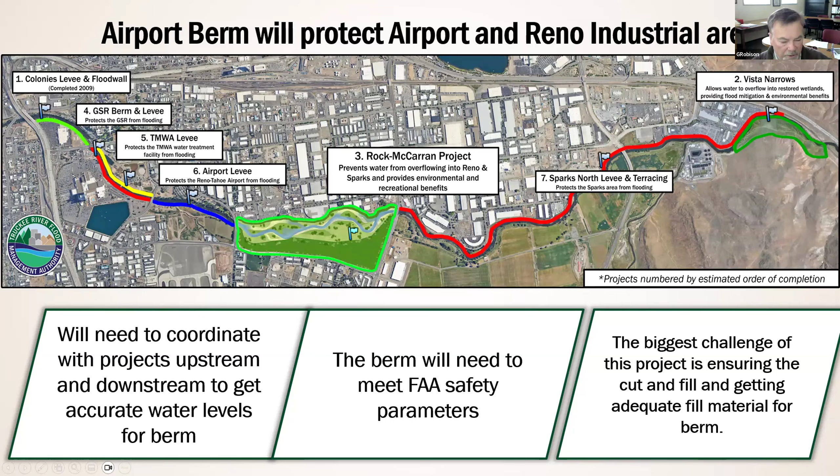So we're looking for a firm that could do all that, and we wanted to get this rolling so that when we're doing all these other projects, it works right in with that for permitting, cost analysis, and everything else. So our selection process—I haven't talked about this one yet.

I did talk about the other two. It sounds a lot like the other two in a lot of ways. Same time, early January, we got out the RFQs. There were 6 statements that came in, just like the other two, the Tumwa and the North Bank levee in Sparks, and then there was a review team.

This one had Sparks, Reno, Washoe County, Turfma, and airport people on it. There were 7 members. In scoring, 2 SOQs had a significantly higher average than the other 4, but there was no consensus on which of the other 2 we should take at that time.

So we decided to do an interview between the 2. After the interviews, for each team, one team consistently gave better answers and distinguished themselves for this project, especially on airport experience. A lot of you were in the room—you remember those answers on airport coordination. They had such good coordination with the airport, and members of the team were even currently doing projects at the airport. So they got a unanimous vote after all that.

And the winning team was a combination of Kimley Horn—and I apologize for putting that R in there, that's something I always do—Kimley Horn, HDR, Crawford, and CME, which is a geotechnical firm, working together on geotech. There were a couple other minor firms. Members of the team have experience with both downstream Rock-McCarran and upstream GSR for this project.

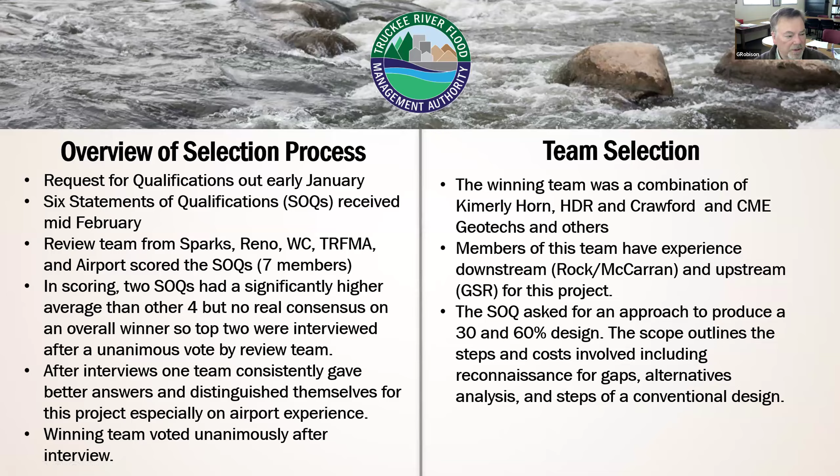So the highlights of this: it's about $1.149 million with contingency built in. The key members again—sorry for the R there—Kimley Horn, HDR, Crawford with CME are the geotechs. There are other team members; you'll see them here in a subsequent slide.

The duration is 2 years on the contract we're doing with TURFMA. The schedule is 17 months. The key outputs are a geotechnical analysis and basis of design report, and that's the biggest deal here. When you look at this area, this is going to be a wide, gentle sloping berm, so getting adequate material to build this and how it would spread out, and what level it needs to be at, are all keys to this.

There is going to be survey and utility layouts because of the broad area that it covers. There's a pioneer ditch in the area, and other utilities that go underground there that we have to account for.

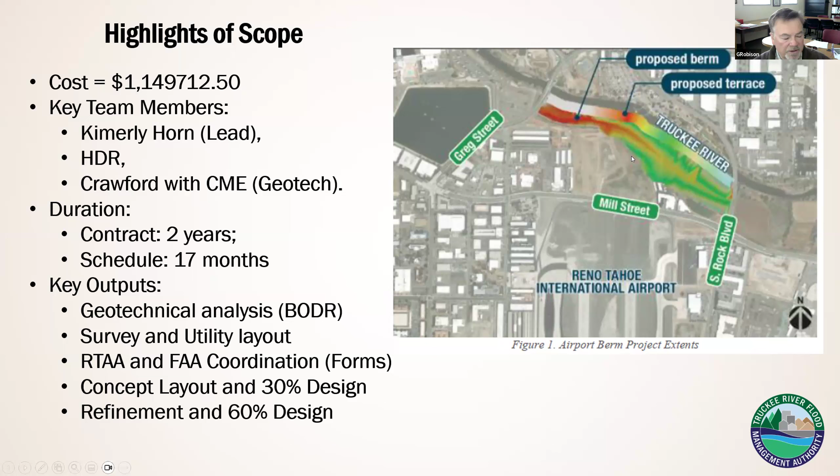A big deal with this one, not present in the others, is coordination with the airport and the FAA. That's one reason we chose this team, because of their experience with that. There will be a 30% design, then refining to 60% design. After that, we'll decide when and how to go into permitting, or go to final design. All that is in the future. We'll see how it works out up to 60% and decide where to go from there.

This is a blow up of the area, showing the existing conditions here. This is the Truckee River up here. It inundates this whole area and gets into the airport. This is just the 100-year flow. It's even worse at 117, which would have been the 97 flood. You can see how it can get into this area, cause a lot of damage, and get around a lot of buildings, getting into the industrial area as well.

So this is a very important location to get a berm, levee, or flood wall, something to stop that. You can see right here, that's the Pioneer Ditch going through. It does get into some of the area and overlap, so there are a lot of considerations here. It's important because of the flooding that would occur.

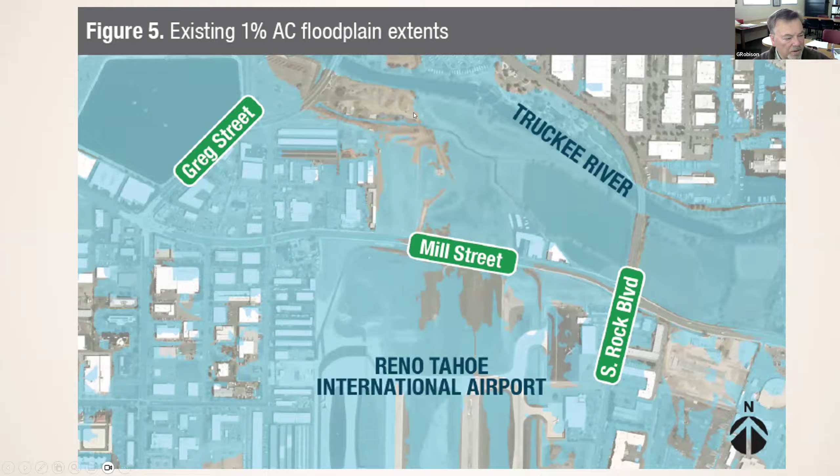Shaker Gorla is the project manager. There's also really strong hydrology and hydraulics with him and Mitch Blum, who works with HDR, and some other people with really strong geotechnical engineering. That's basically the same team as the Crawford team involved with the Rock-McCarran project.

So they have a lot of that information already. They're also working on the Tumwa project, so there's a lot of overlap here. When you get into the civil design, public outreach, and airfield coordination, their staff has a large presence right here in Reno, with a lot of current experience with the airport. The geotechnical engineer who works locally here, Nick Anderson with CME, is also working with the airport currently.

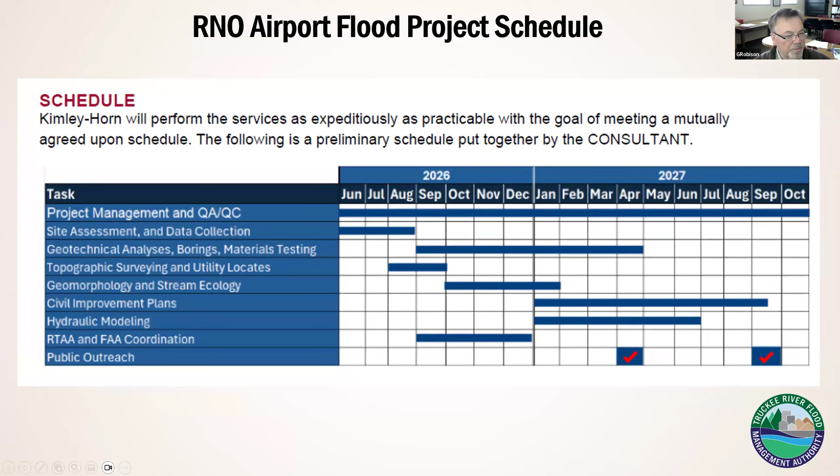You'll see that in the budget here. The geotechnical accounts for about 40% of the base budget of about $1 million, so roughly 40%. The civil improvement plans are another 20%. So the bulk of this is those two tasks. When I reviewed it, I really focused on those two tasks and honed them down to make sure they were correct. It's also a not-to-exceed budget, not a lump sum, so it's whatever it takes up to that amount, and we have some contingency in case we go over in some categories. So that's it in a nutshell.

I didn't want to spend a lot of time on this because we're going to be doing Rock-McCarran. So I'll just open it up for questions at this point if anybody has any, and then we can talk about it. All I'm looking for here is any suggestions you may have.

Mike, did we have something like what was the language there for possible action? Yeah, we do. The possible action on this one is to recommend to the board of directors that the scope of services be the basis for a contract with Kimley Horn. Okay, so it's basically approval of the scope. Okay.

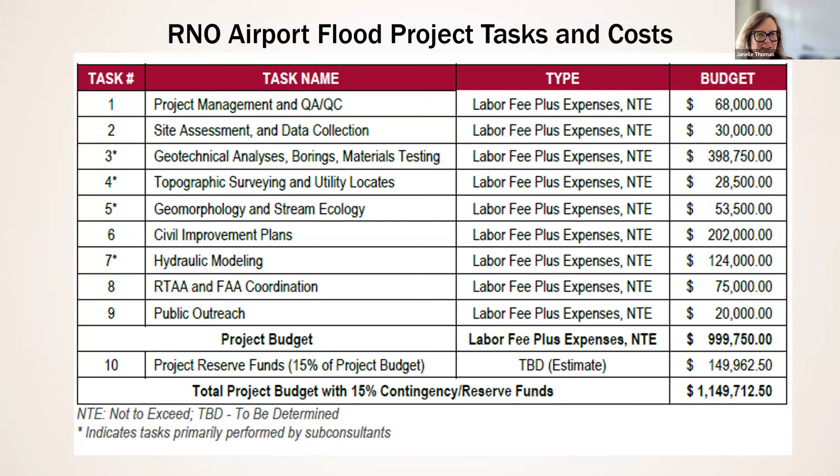Do I have a second? I'll second. Okay, Amber, a second. All those in favor, say aye. Aye. Aye. Any opposed, say nay. And abstaining is Zachary Carter. Correct, thank you. All right, motion carries.

Do we have any public comments? Was there any public comment? I didn't see any, no. Yeah, but we have to ask. You have to ask. Okay. Sorry, I could have caught that, Janelle. No worries. I'll call for a public comment. Seeing none, we'll close public comment and close the item.

All right, so moving on to item 7, presentation and discussion of the Truckee River Rock-McCarran Reach Flood Project 30% Design Report from JUB Engineering, Inc. And I will pass this off to either George or Shane.

All right, I'll share my screen. I think George might start us out, but I'm going to share my screen here. We can see it. Okay, I'll start out talking. I'm going to hand this over to Shane pretty quickly here, but what I wanted to do today is give you guys some ideas about what we're going to share next Wednesday, and it also gives an overview of the 30% while we're doing it.

The 30%, we handed that out for review quite a while ago because it's so big. And I also recommended to the different people on the committees to just maybe focus on what they're interested in because it's so big. I mean, there's over 200 drawings on that thing. And I think it's over 600 pages long on the basis of design part of it for 30%. So there's a lot to this.

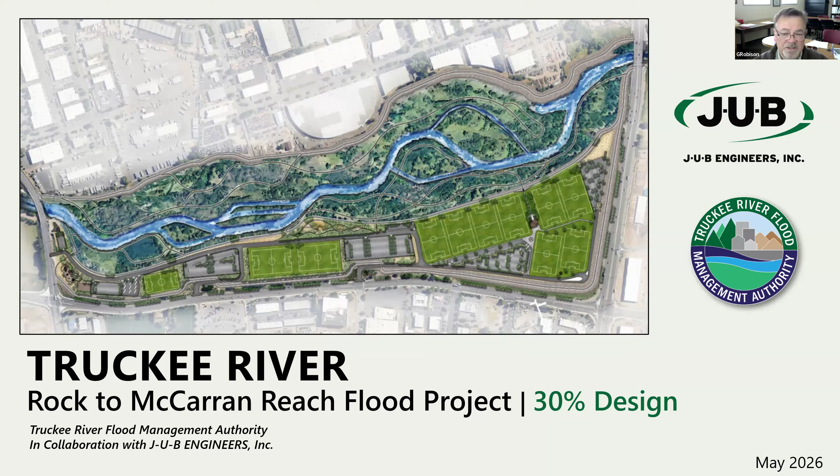So we wanted to just try to boil this down a bit for the public for this meeting and then allow the public to ask questions and make comments on it at the meeting next week. So this would be the presentation, but I wanted to run it by the TAC to see if there were any comments to improve, change things, add things, subtract things, etc. So that's the idea behind this.

Could you forward it, please, Shane? So it'll be primarily myself just for the first couple of slides, and then Shane will pick it up from there. And you can see the purpose of the meeting and everything. And this is really the Wednesday meeting. This is a draft of it. This isn't the final, but it is kind of what we're intending to do. Next slide.

This will be the layout of the agenda, the background of the project, which I'll go through fast since you guys know it. The community outreach effort, I think a lot of you already know that too. The key design criteria, and then the place I'd probably want to spend some time on is the 30% key design features. There's a phasing element to this because of the costs of some of the recreational elements, so we'll get into that when we get there. Then the cost estimate, and finally going through what's next as we go through the 30% and go to 60.

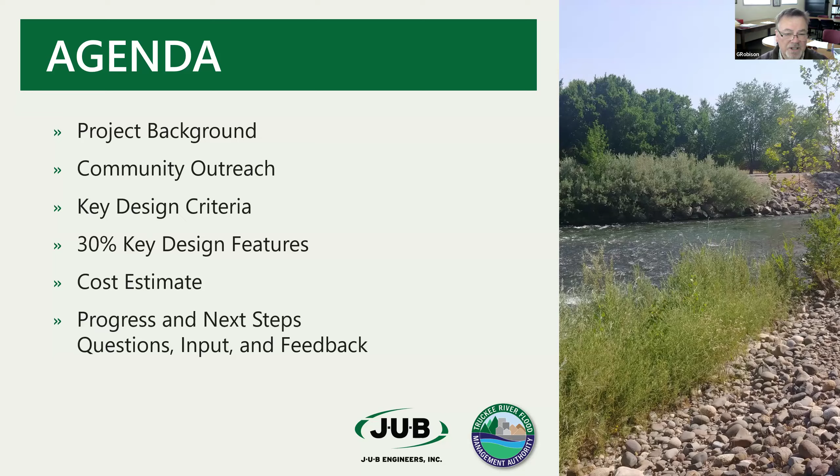A lot of the comments, like I had some great comments from the city of Reno on tree selections and some other things about the sewers. I think a lot of that, what we're going to do is carry into the 60. I don't want to necessarily deal with it at the 30, but those were great comments. As we go forward to the 60, we're going to have to consult on traffic, and on the bridge, the McCarran Bridge, with NDOT, because we're trying to open that up a bit since it has some capacity issues with all the extra water that will be coming down from the other projects, because the water's being contained within the river. So anyways, that's the agenda.

This will be the last slide I'll be dealing with, but just the fact that we went through that alternatives analysis, and then we also went through a second alternatives analysis, getting to the preferred park alternative, where we really honed down on two approaches and lots of comments - we're talking approaching 300 or 400 comments at this point. We came down on a combination park where we have a corridor area that's very wide, that has buffering, that has a width to it that's wider than the meander opening prescribed for this reach. That's a really positive thing - typically you don't see that in urban areas. So we have that, and then of course, where the detention basin is, a park alternative, that's where the ball fields would be for soccer or other flat field sports, and then also a linear park, parking, and a number of trails both in the detention basin area and in the corridor area for the river. So anyways, with that, I'm going to hand it over to Shane, let him carry forward.

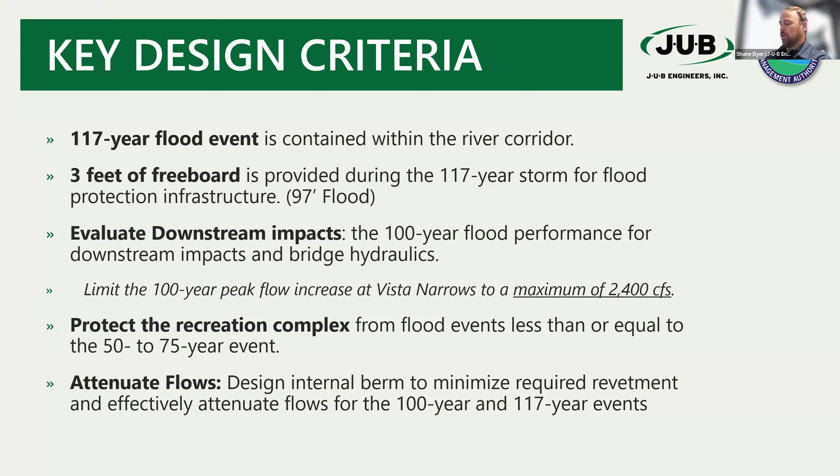We're going to start with going through the key design criteria, talking about the 117-year flood event and the 3 feet of freeboard, and then how we had to evaluate downstream impacts - we couldn't increase the flow more than 2,400 CFS for the whole flood project. Another design criteria was protecting the recreation complex from larger floods while also attenuating the flows. So we'll go through the key design criteria with the group.

And then we're going to talk about the key design features - the river corridor, environmental, transportation, and then we'll go into the nature park and recreation.

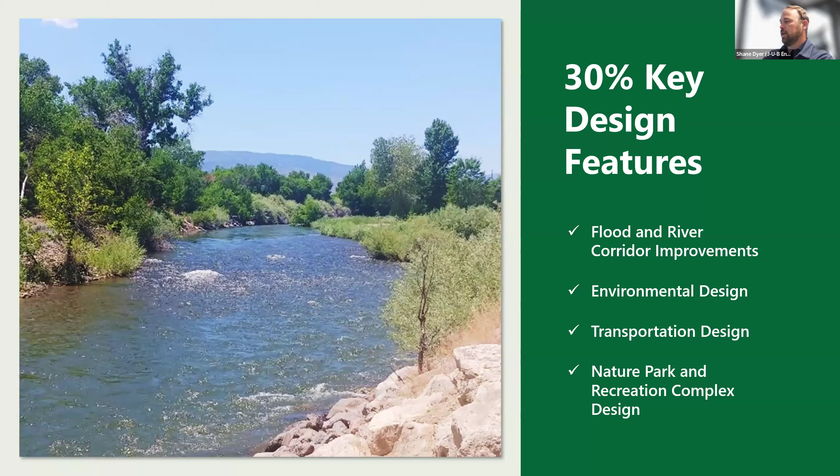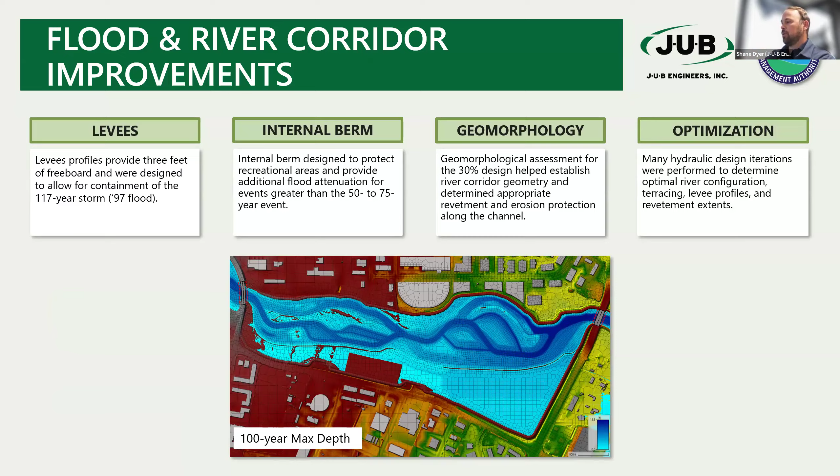Jumping into the flood and river corridor, we'll talk about the levees, how they provide the 3 feet of freeboard for that 117-year event, which is kind of dictated by the 97 flood. The internal berm is designed to protect the recreation area and also attenuate the flood. We'll go over the geomorphology and how it helped establish the geometry, and then how we worked on the optimization - we have the 100-year max depth there.

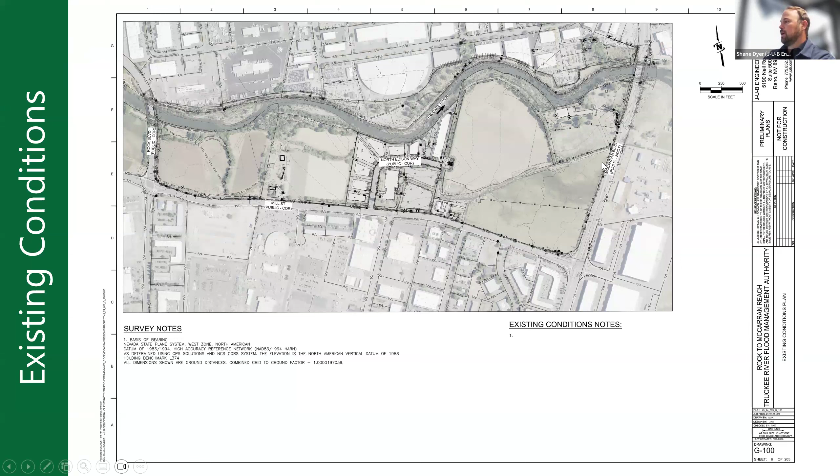Starting with just the existing plan so people can see where the river is now - we're constrained by buildings on the top, buildings on the bottom, farms with direct runoff into the river. And then jumping into the grading plan.

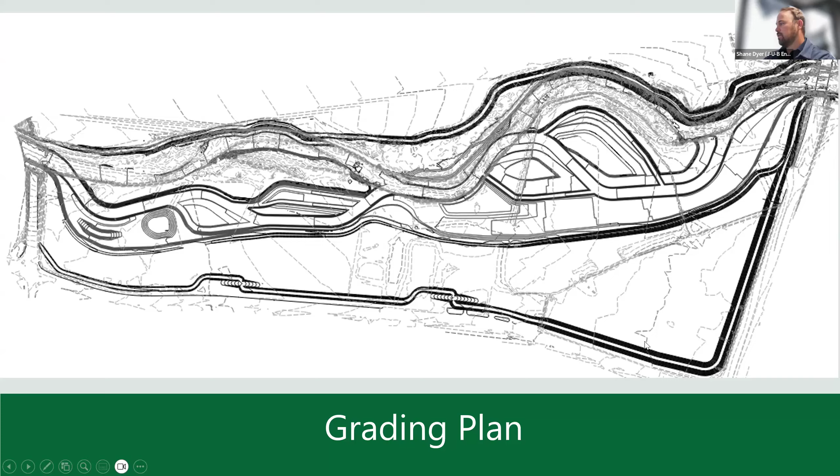So just showing the grading plan, and talking about - you can actually see the levees here: the north levee, the internal berm levee, and then the south levee. And then I show it on the render as well, so it's a little easier to access if you're not used to looking at plans.

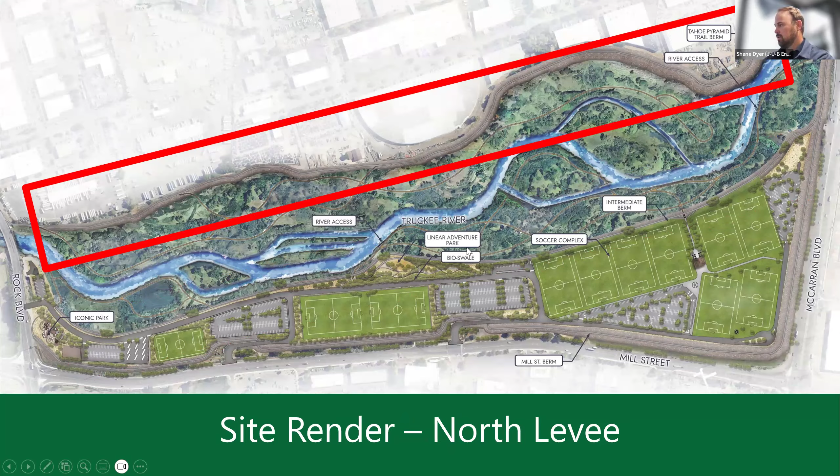You can see the north levee, the internal berm levee that goes right along - there's a path on top of it, so you can see it because there's a path right along there. And then the south levee - just giving everybody a second to understand that's how we're containing the river in this 30% design.

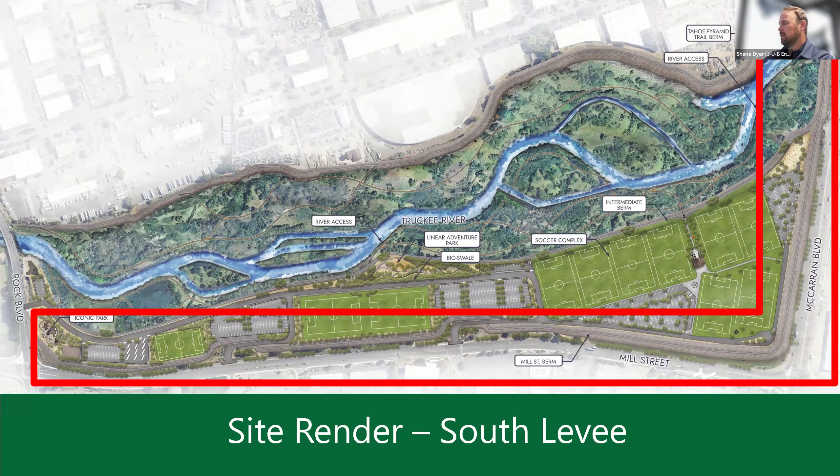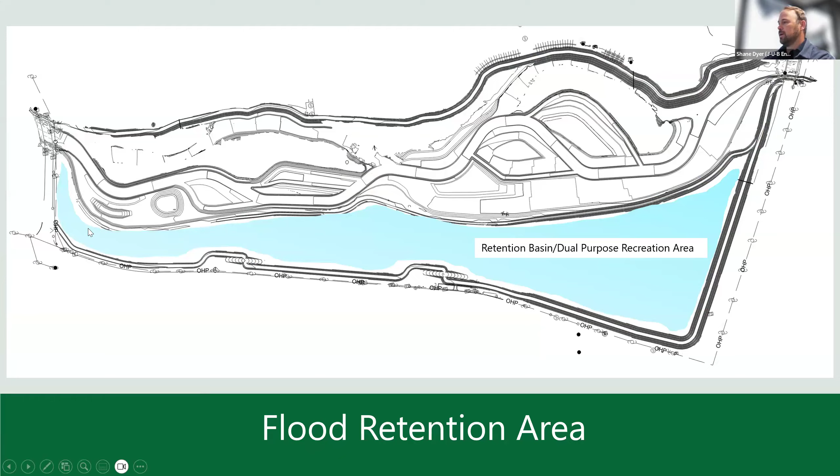And then showing where the retention basin is for people. Essentially, the area that's going to attenuate the flood is shown in blue, and the meander belt and river corridor is really between the north and the internal berm. So just showing where that retention basin is.

And then showing what the average flow looks like - this is your low flow, 350 CFS. You can see the blue is where the river is going to be most of the time. Then we show a 5-year event, which really activates the whole river design, the whole channel system. And then the 100-year event, which you can see now actually inundates the retention basin area, the attenuation basin, that dual purpose recreation area.

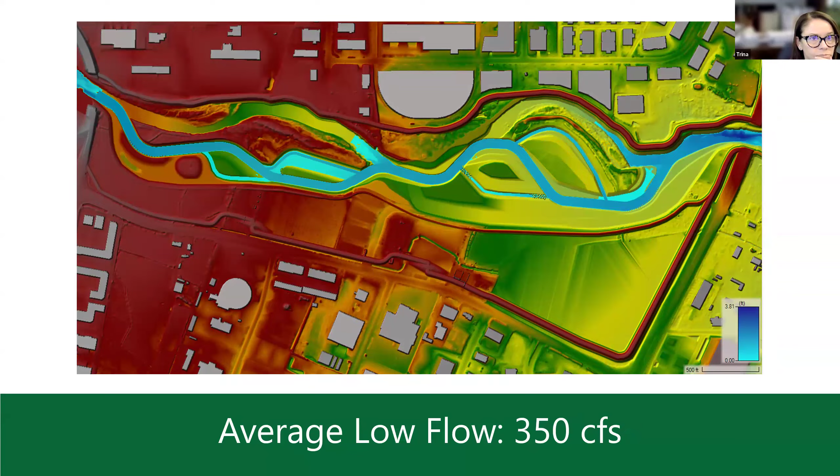I understand this. Do you have one that's 50 or 75 that shows what it looks like keeping the park elements dry? We could definitely add one. It would look a lot like this, except it'd be blue end to end. We could show that. I think it might help people understand that we're protecting those things to that level. Yeah, no problem, we can have that in.

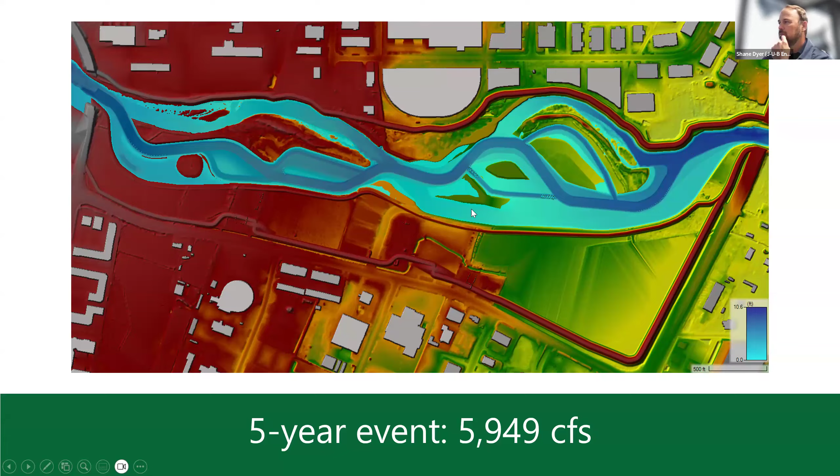So for mine, could you go back to the revetment figure? So one of the things, just as a reminder, one of the reasons we allow this corridor to be so wide is to lower the velocity, so the type of revetment we use also avoids heavy riprap. In some cases we're using different kinds of bioengineering techniques that don't even get into large-scale riprap, like 3-foot boulder minus, that kind of thing. We're trying to avoid that as much as possible because that's actually not natural to the Truckee River in this section. It is upstream, but not here.

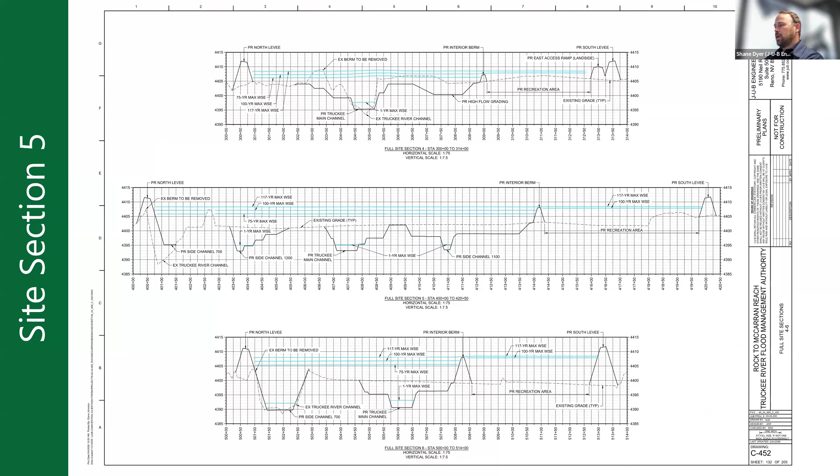So we picked one here, one of the large sections. In the plans it looks like this, and it's a little hard to access, so we pulled this out and made a figure that you're familiar with. We show the cross section here, and then over here it correlates. So we have the north levee here, and the north levee here, and kind of walk them through. Okay, this is the 5-year. Here's the different channels, here's the main channel, here's the flood attenuation area, and here's the 100-year event, like what that looks like, and show them that.

Yeah Trina, in the same vein of what John was just saying, I don't think an average citizen understands what a cross section is. So maybe walk them through it, like you're standing on the North Bank levee in Sparks, and you walk down the bank, and then you walk into the river, and walk through like this. It might give them a better idea of what a cross section is, because I'm not sure people understand that. It's not intuitive, I don't think.

I like that, I'll try to explain it like that in the meeting, and I think this will help. We're also going to show the video, I think you've all seen it, where we do the YouTube video where it comes down the thing, and we can watch it here if you want. I have it up, but we don't have to. So that'll also help them. Okay, here's the cross section, we're going to go across the render so people can see what it looks like as they go across.

Yeah George, I was just wondering, maybe you put this slide first and then at the end say, you know, when we're doing design and construction it looks like this, rather than starting off with that and them thinking 'what the heck is that'. Put the video and render first, then show them, but explain that in design this is what we do so a constructor knows exactly where they stand and all that stuff. Okay, got that. I think if you switch it you'll probably do quite well with that instead of going with that really cryptic cross section first.

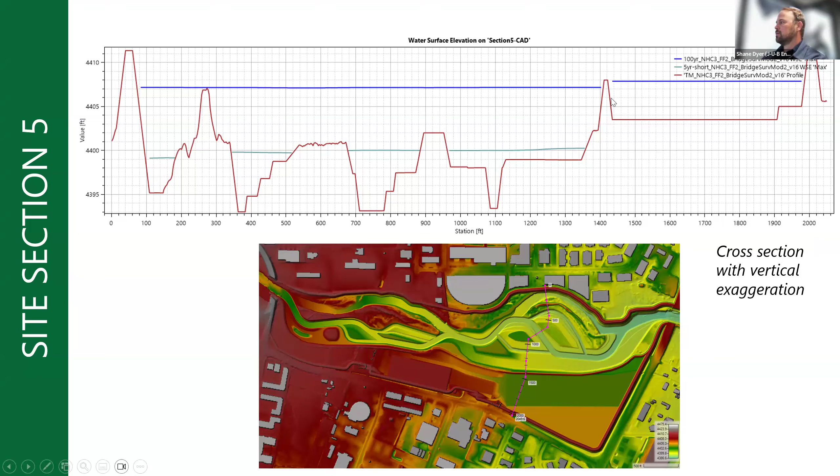So then that's kind of the- Do you want to show where the notch is on that? Let's see if I can find them. We don't show the notches, but they're right here, and you can see it in the grading. There's actually 2 notches, the way that we fill it up, so they're here and here. Okay, you want me to circle them, or is that too much detail for this crew? I don't know if the general public is interested, but yeah, there's notch 1 and notch 2 over here.

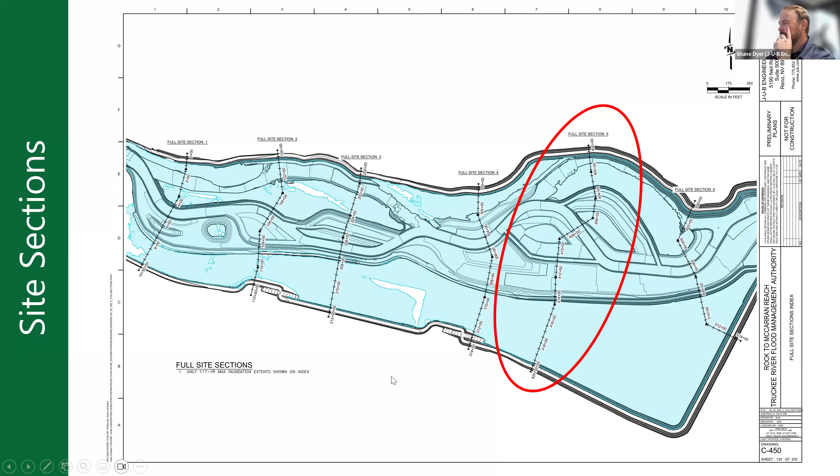Okay, so that's kind of the end of the river corridor and flood design, and then I jump into the environmental design portion. I don't know if you heard me before, but I have a question about the McCarran Bridge. Are you guys covering that at all in this presentation?

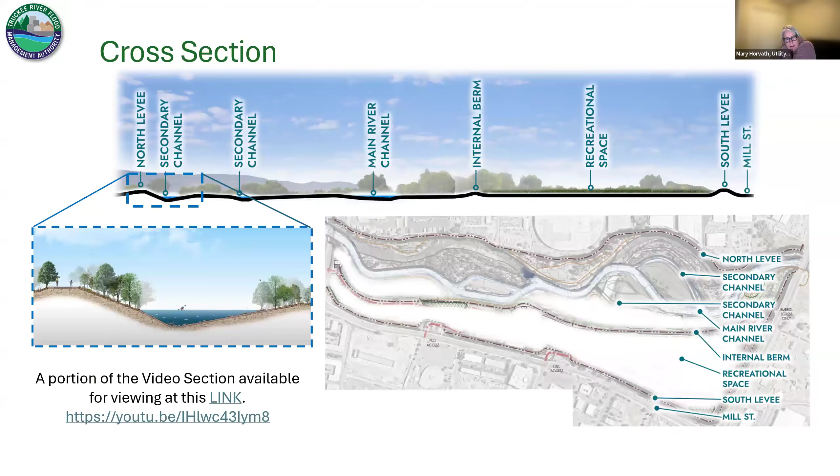Tell me what you want to know. Well, I just wanted to know what the opening was going to look like, or I know you guys are still working on dialing it in, but like how much freeboard or something like that, just what the cross section is going to look like compared to existing conditions. Yeah, we have that, and we have a new sidewalk and things. I wonder if that's too much detail for this crew, but if you want that, let me know. I think we could add how we're adding the connection underneath the bridge.

One of the issues there is that NDOW is still, we're talking about the bats underneath the McCarran Bridge, and it's still in discussions. We're pretty sure we're going to be able to do it. They're like, yeah, we can do it, but with mitigation and different gates, maybe at certain seasons and things like that. So we're not quite there yet, maybe for the public.

Yeah, I'm sure the public is going to be very interested in the bats because there were like 50 comments about the bats, but I'm really interested in what the bridge opening is going to look like. And also, not for the public presentation, are you still treating McCarran as an internal boundary condition in your modeling? Is McCarran still treated as an internal boundary condition in your hydraulic model? Yeah. Okay, because it wasn't that clear in the report, but I was interested in the cross section.

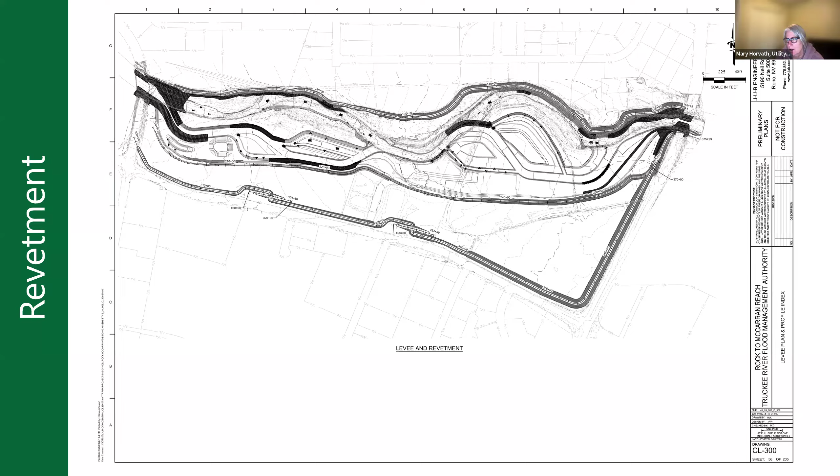George, what do you got?

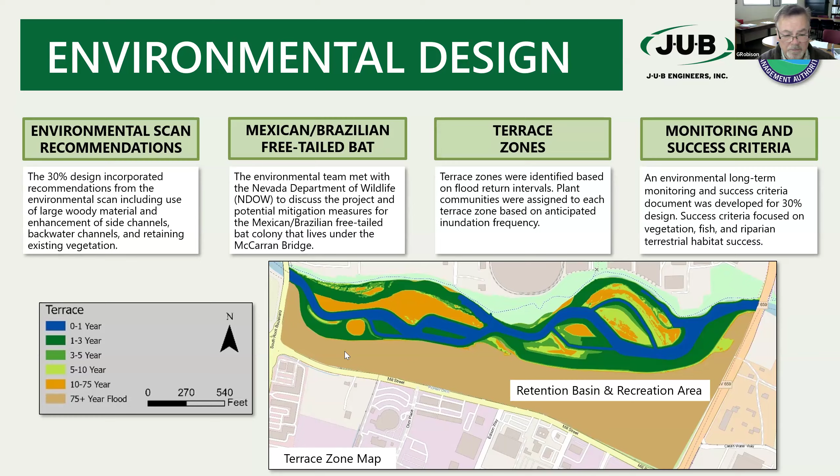Okay, so then we have monitoring success criteria, and then I jump into some of the environmental designs in the river corridor. Here's where we go over the meander belt - the river corridor has a really unique situation to be able, in an urban area, to have enough room to create the true meander belt of 600 to 800 feet, to allow for that living river, which is a big deal in an urban area.

And then talk about the alternative revetment types, which this is interesting because we're adding that slide above, but it's really reduced riprap, vegetated riprap, geocells, woody debris, and stream restoration techniques.

And then habitat creation - there's going to be significant improvements to the riparian zone. Right now it's a degraded river section with lots of rock, and there's no overbanks, and we're going to make it a really nice environmental system.

We have 2 backwater channels that have been designed in that are going to support rearing habitat for aquatic species and planned natural pool and riffle sequences. So we're going to turn it into a real natural river system, from what it is now, which is a degraded system.

And then the terraces - we have 4 unique terrace zones for vegetated communities, shown below. You can see there's the stream channel, then the wetland bench, the riparian bench, and the uplands. We have different species plantings for each one of those terrace zones in the plan we're working on.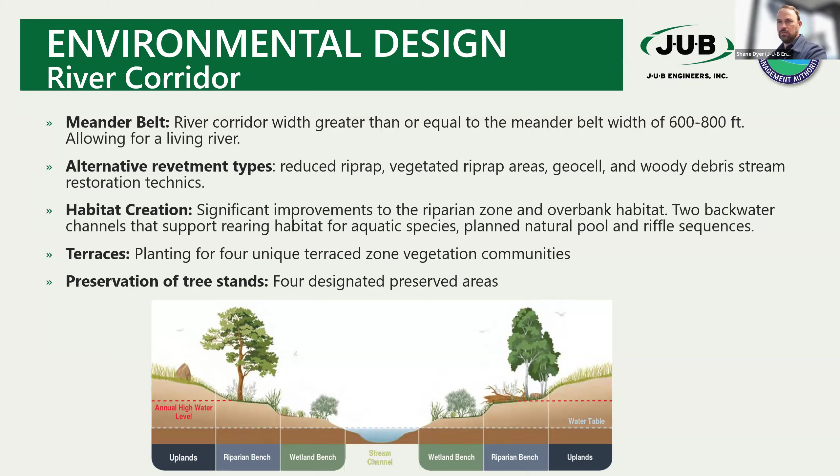Thank you. Yeah, you bet. Good comment, Zach, as usual.

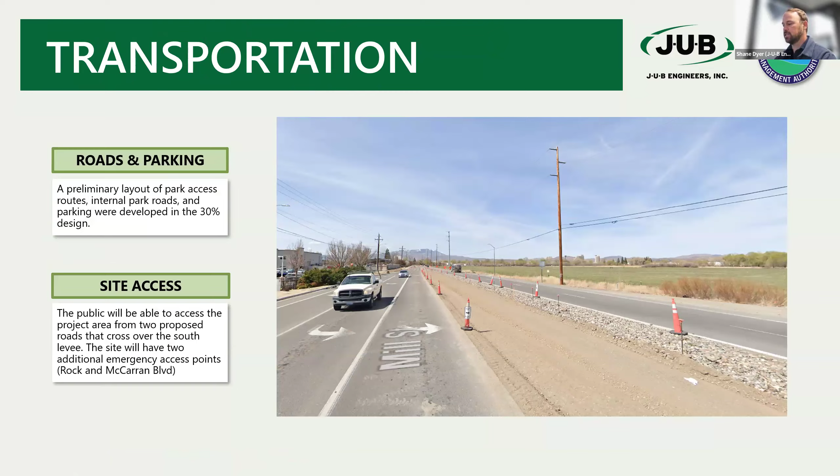All right, roads and parking. Essentially we have a preliminary layout with all the internal roads and the parking, and the site will be able to access, or the access will be with 2 proposed roads. It will also have 2 additional emergency access points, so 4 ingress egress points total.

Here's the transportation layout, that thing got moved a little bit. Essentially these 2 are the public access spots, and then we've got the emergency access, one on Rock and one on McCarran. And then you can kind of see the different parking. We've listed the total parking spots here, 1,234 total parking spots in the design.

Not a lot to say about that, maybe just let people look at it for a second. And then that's all I'm doing for transportation.

What's happening now is with the 30% design, we have to turn that into the city of Reno, and we're going to work with them on what requirements from a traffic study perspective they're going to see as we move forward. And then with those traffic study requirements we'll move forward and try to finalize these transportation plans. Go ahead, Mary.

So yeah, they've been bugging me, the Public Works Department's been bugging me for a meeting, and this is the time to do it. So I can send you a list of who will want to be included in that, but we'll probably include some people from our department as well.

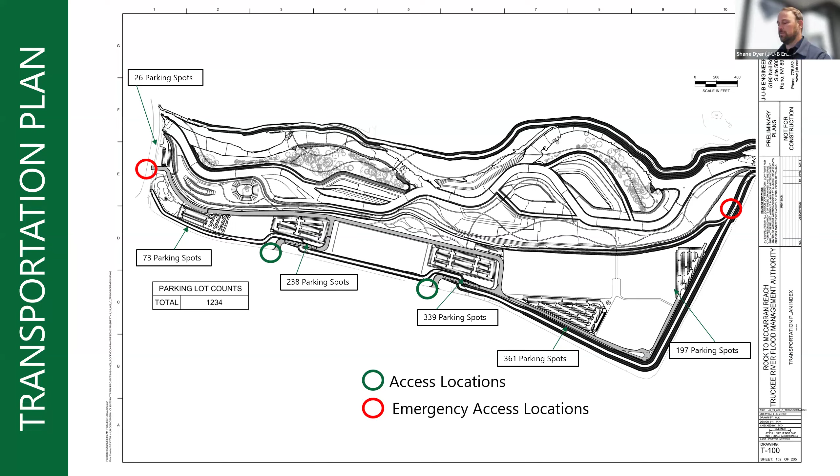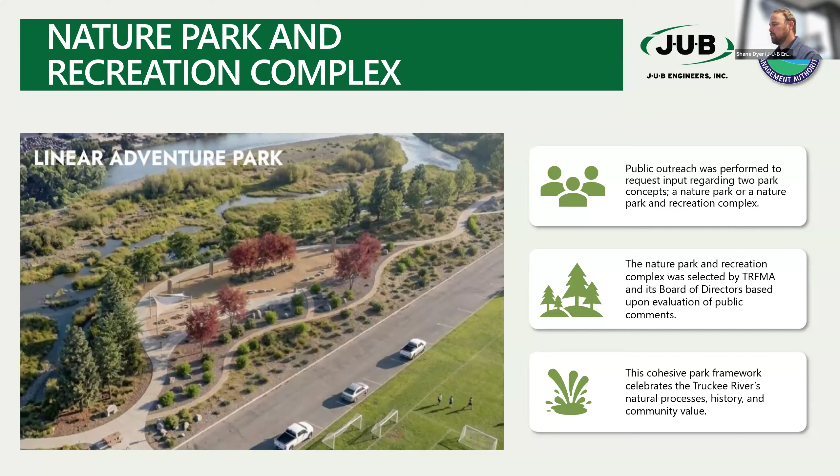Then we jump into the nature park and recreation complex, and I think a lot of people are really interested in this. So we'll start talking about how the public outreach was performed, requesting input regarding two park concepts, the nature park and the recreation complex. A combination of the parks was selected, doing both a nature park and a recreation area, and the theming for this was themes that celebrate the Truckee River's natural processes, history, and community value.

And then put up the render and talk about some things happening here. So starting from the riverside, we've got 3 river access points here.

Up here, this is the Tahoe Pyramid Trail, and that ties into the North Levee.

Starting on the left here, we've got this iconic park, which we'll show some pictures of. We've got the 8, 9, 10, 11 fields here for the design, with bus parking for tournament style parking. We've got a little maintenance yard here for the linear park, which is going to be the headlining park of the area. And then we've got the fields. So just go over that with people.

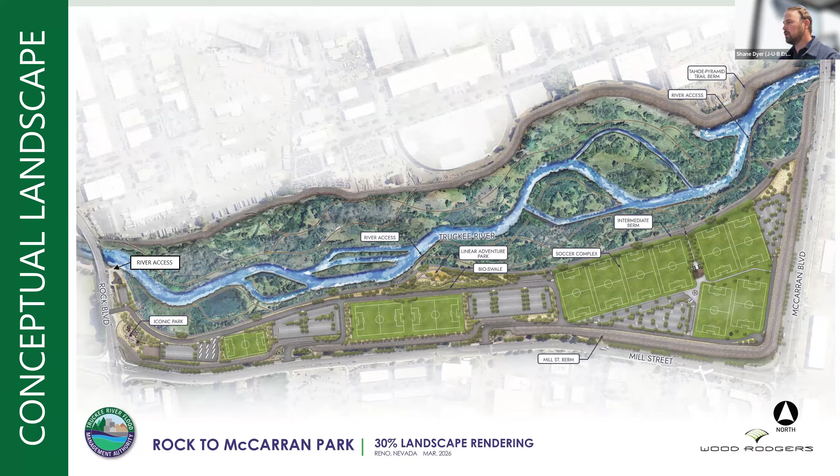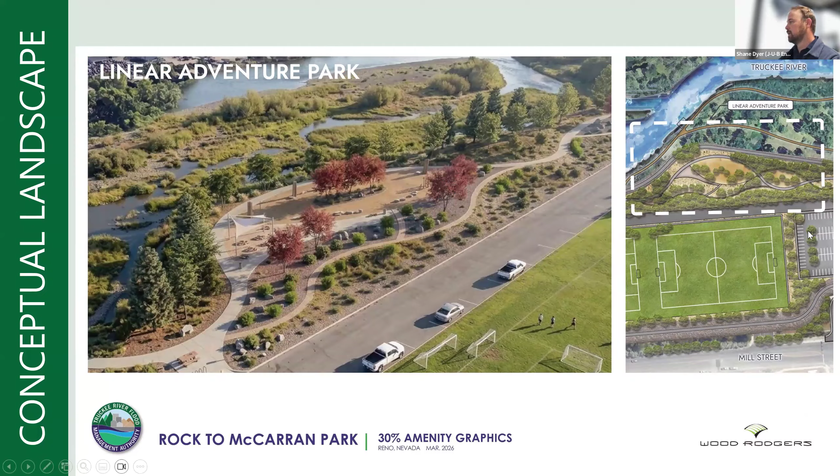Hey, on the park structures, are we talking about ADA park structures for Reno, or just - I don't know if these ones are ADA. Is David on the call? Because that may become a hot topic, so I just don't know what Reno has.

David, are these ADA play structures? Shane, the 2 to 5 play structure, which is the smaller one on the right, and then the 5 to 12 - these are age ranges - play structure, which is the lower one on the left, they are ADA accessible. If you look at the iconic Hydra Tower in the back, that black kind of walkway is a rigid rubberized walkway that is also ADA accessible.

In this image, if you see that little boy with the red and white shirt at the central pylon and go directly down, you'll see a wheelchair that is empty because the child in that wheelchair is playing on the equipment in the 5 to 12 area. So while getting up into that main tower is not ADA accessible, the entirety of the rest of the play equipment here is ADA accessible.

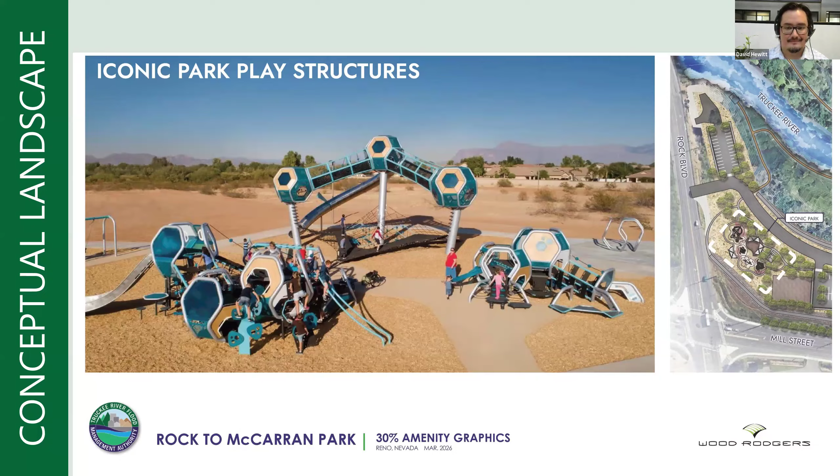Linear Park, the Mill Street levee there.

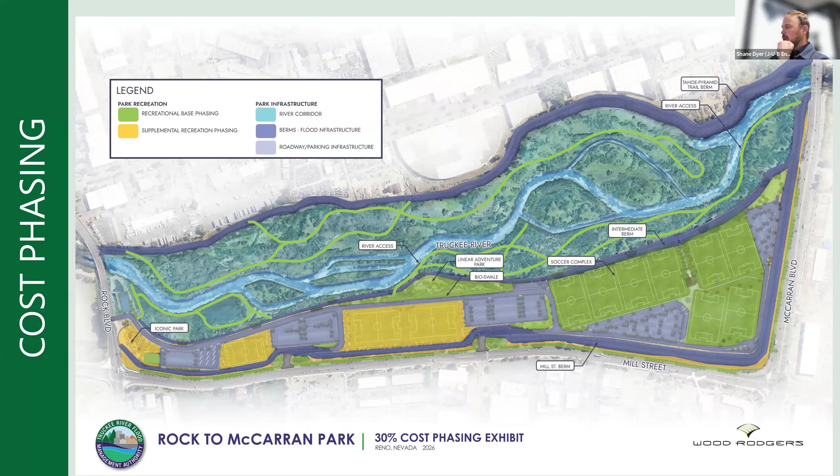So this is the base. Everything in green is included—the nature park, the nature trails, the linear park, the championship fields, and the parking. We keep the maintenance yard and portions of the entry monumentation, but not the iconic monumentation, which was a relatively high price tag for some of those beautiful signs.

Just a question about the phasing—are we going to talk about that a little more? What's the plan there? We have the costs, and we're going into what each phase is right here. That should answer the questions, but you might want to wait for a few slides and see.

So that's the recreational base, and these are the things included in it. We've got the fields, some of the restrooms—that restroom might be a little misleading because we're not going to have a full structure like that, it's just going to be the bathrooms, so you might want to change that one out. Entry monumentation, the river access, the parks—that's what's in the base.

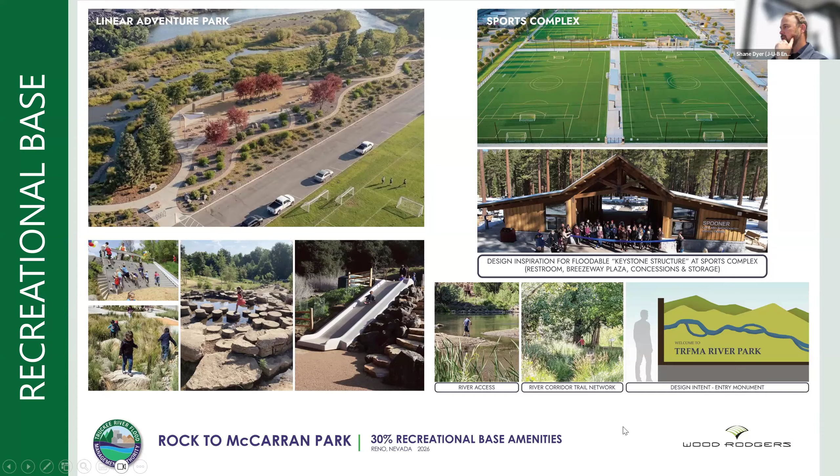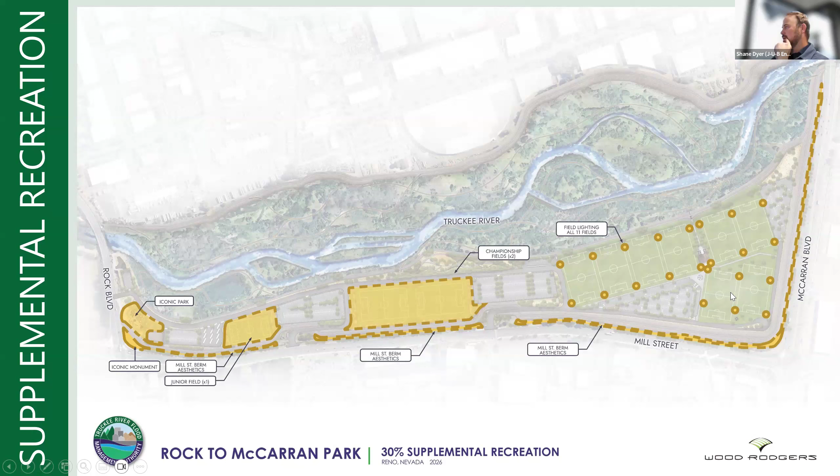Then we go into the supplemental recreation, which includes the lighting, a couple extra fields, some of the berm aesthetics, the iconic monumentation out on this corner—that big, beautiful sign—and the iconic park. Here are some pictures of things that would be left out: the lighting itself, this big designed sign, this park, some of the berm aesthetics potentially, and some of the fancy wayfinding signs.

So then we go into this cost estimate— oh yeah, go ahead, Trina. Sorry, that was my hand up from before. Keep going, thank you.

So there might be a lot of discussion about what should and shouldn't be part of the base versus supplemental, and we're totally open to that. We took a stab at it, but I feel like other people might have strong opinions, so we're fine with whatever people want, working with TRFMA—we'll let TRFMA guide that, and whatever they tell us to do, we'll do. That's really it that we have for the recreation side of things.

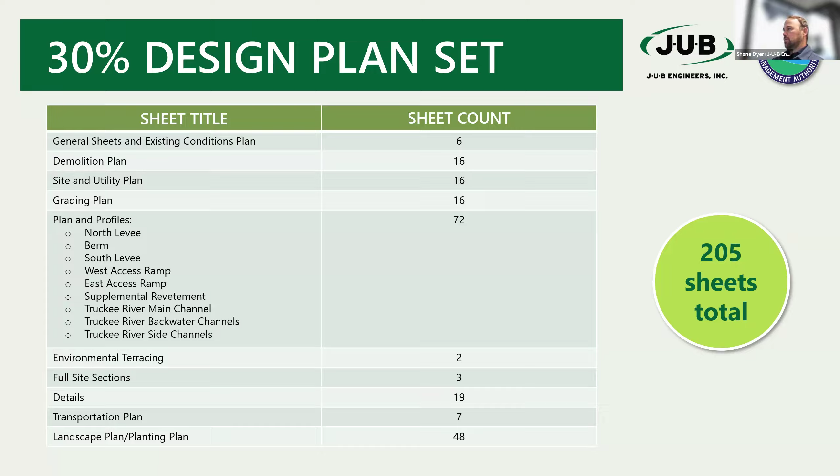And then we're pretty much done here. We've talked about wrapping up the 30% design plans. We had 205 total sheets, and it lays out what they are. And then we just go into the progress and next steps.

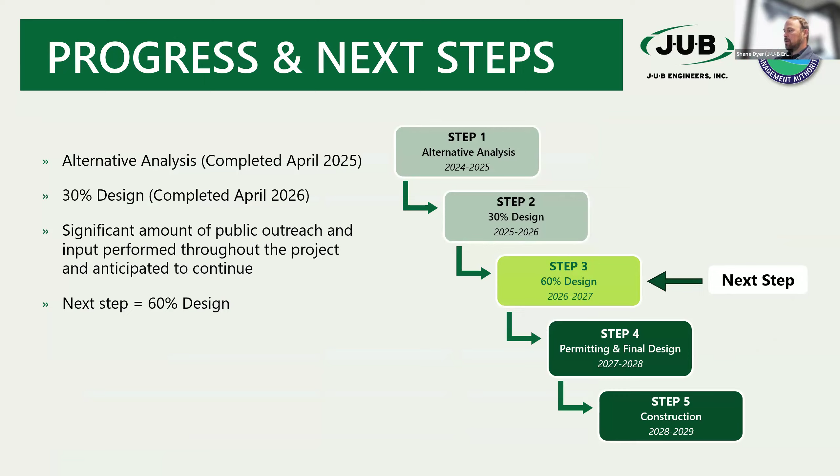So we're done with the 30% design. The next step, after we get comments on this 30% design, we're going to implement it into the 60% design as we move forward. We're going to try and use the 30% design comments to really guide us as we do that 60% design. And then we go into questions.

Yeah, Trina. So back to that, looks like $11.6 million between your base plan and the supplemental. George, what's the thought process behind that? Because I thought originally, I'm trying to remember what the original park elements cost presented to the board was. Is this above that?

This gets into more policy, that at the board meeting the idea was that back then the estimate was 87 million, I believe. And I had recreation in there at a certain level. And I said at that time that if it really got out of hand in terms of costs, we could phase this, we could use outside sourcing if people want extra things at that point. But we do want to have a certain level of recreation as part of the detention basin, and in the corridor as well. There's a lot of trails in the corridor.

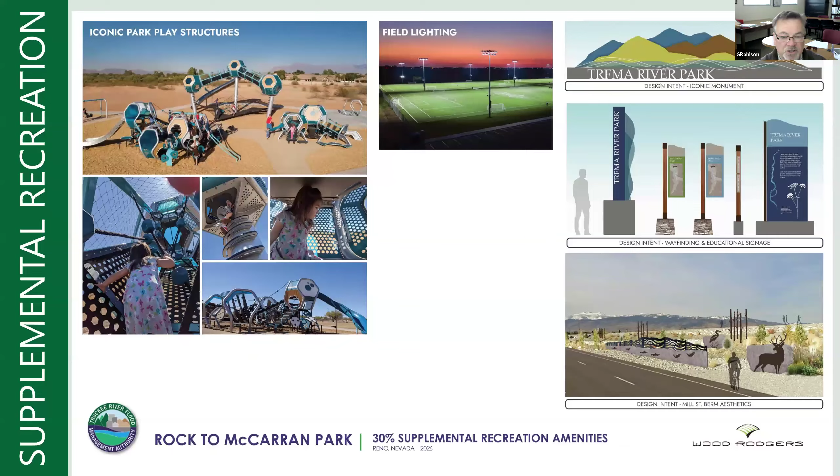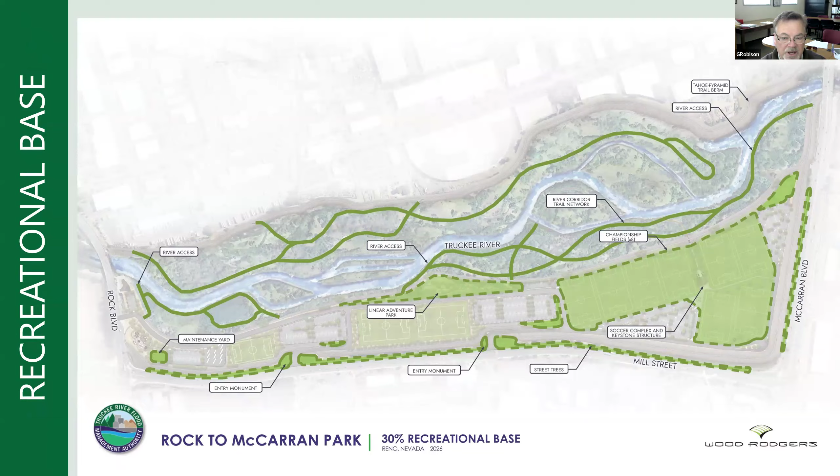That one slide a few back with the green trails really illustrates how many trails there are. There's a lot that's in the base. I don't think there's any more in the supplemental, but it just shows all the major trails that are being thought about, besides the main trails which are on the two levees and the berm.

So anyways, the idea at that last meeting, the key meeting where they allowed us to go to the 30%, was that it's about 87 million right now. If it gets too much, we can always phase, we can always ask for outside crowdfunding, something like that. And so when it got to be 104 million, and looking at my cash flow in the strategic plan, I needed to stay around 90 to 95 million. So that's why we're phasing what we're phasing.

Okay, that's helpful. Thank you.

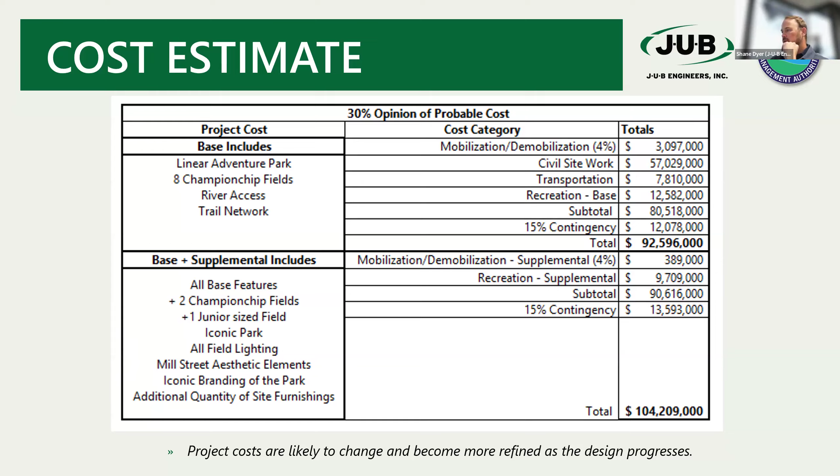So if you can think of anything we've missed here that people would want to see on a 30% design from a public perspective, now's the time to have us put it in. This meeting is next Wednesday afternoon, and we'll make the changes discussed here today as well. I think we anticipate quite a bit of public input and feedback on this, and good participation.

That's all I have, George. I'll open it up to public comment, or if anybody else has comments.

Ellen, your hand is raised. You'll have to unmute yourself. I asked them to unmute, but they're still muted. Okay, there we go, sorry. This is Roger Jacobson, I'm on Ellen's machine.

A couple of quick things that the general public might like to know. One is the areas between the natural area and the field areas. Another is whether flood control money can be used for the ball fields. You're talking about the various stages of money, which I think, George, is a really good way to present that, but make sure it's stated very clearly that a large amount of this money will be coming from the flood control money.